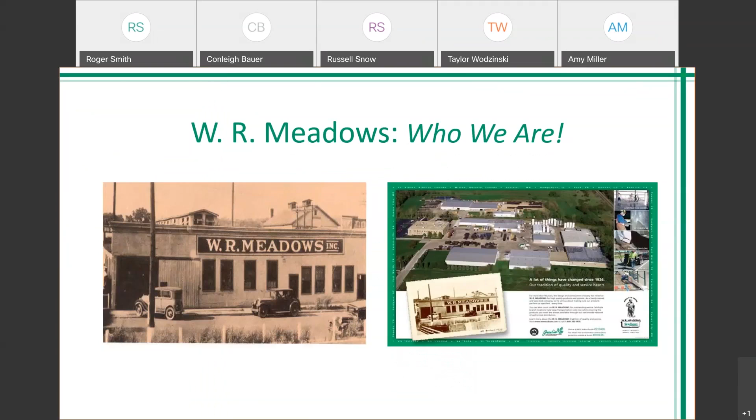Before we jump into the true content of this presentation, a quick recap of who WR Meadows is and why you should care about what we have to say. We were established in 1926. WR Meadows is a family-owned company, still owned and operated by the Meadows family today. We have 12 facilities in North America, most in the United States, but a few in Canada as well. And we have a huge portfolio of products.

We started off in 1926 with expansion joint materials, and we still produce expansion joint materials today. We have since expanded our portfolio to include concrete restoration products, construction liquids, joint sealants, and decorative concrete. We have a lot of building envelope products, which is what we're discussing today, specifically vapor retarders, but we also have above grade air barriers and below grade waterproofing, both horizontal and vertical.

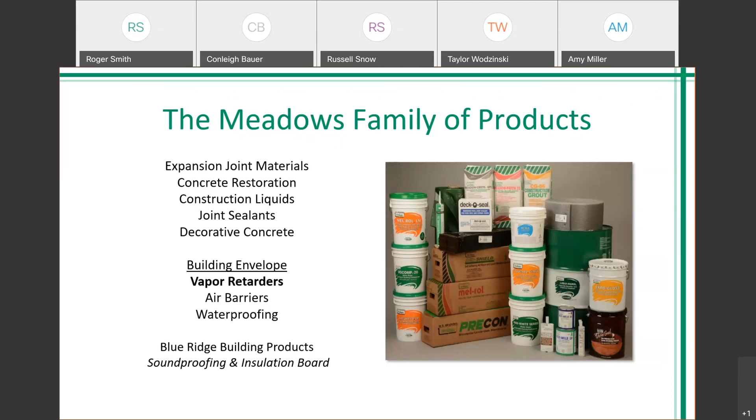The last note on this slide is just a shout out to Blue Ridge Building Products. They are a sister company of ours and they do soundproofing and insulation board. If you have any questions about soundproofing and insulation board, unfortunately I'm not the correct person to talk to, but if you get in touch with us, we can get you in touch with the right person.

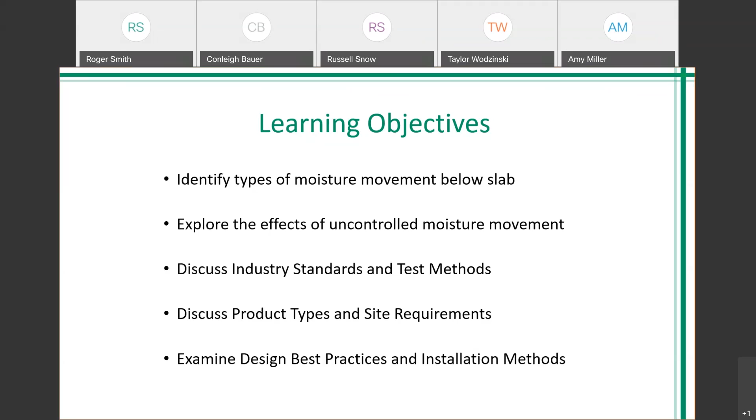What we're going to discuss today, some of our main learning objectives: first, to identify the moisture movement that occurs in our structure, specifically below slab. Why do we care about uncontrolled moisture movement, and what are some of the effects we're trying to reduce? We'll talk about some industry standards, ASTM, ACI, and the different test methods we can use. Towards the end of the presentation, we'll get more specific on product types and which to use depending on site conditions. We'll top it off with some best practices for design and installation methods, and how to ensure you get what you want on your project installed correctly.

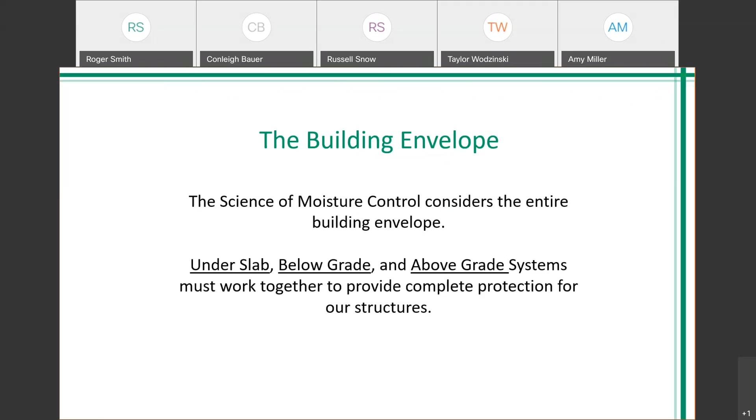As we move into the science of moisture control, it's no longer adequate to just talk about underslab or just talk about wall. We really are talking now about the building envelope, or even further, the building enclosure. It's important to understand that underslab, below grade, and above grade systems have to work together, be continuous and compatible, because underslab is just one part of the envelope.

The best place to start is at the beginning. In its most basic concept, the hydrologic cycle is this constant change of state from liquid water into water vapor, or water as a gas. So we have liquid water that absorbs a lot of energy, typically through thermal energy, turns into water vapor through evaporation. And then as that water vapor loses energy, it condenses back into liquid water.

When we build a structure, we put our structure right in the middle of the cycle. So it's not how do we fight against this cycle, it's how do we work with this cycle to move moisture out of our buildings.

When we're talking about moisture protection, we're talking about moisture in three forms. The first being liquid water, which is the most obvious. Also water vapor, water as a gas, as it moves through air. And thirdly, water vapor as it moves through diffusion - that's water vapor moving through any other substrate other than air.

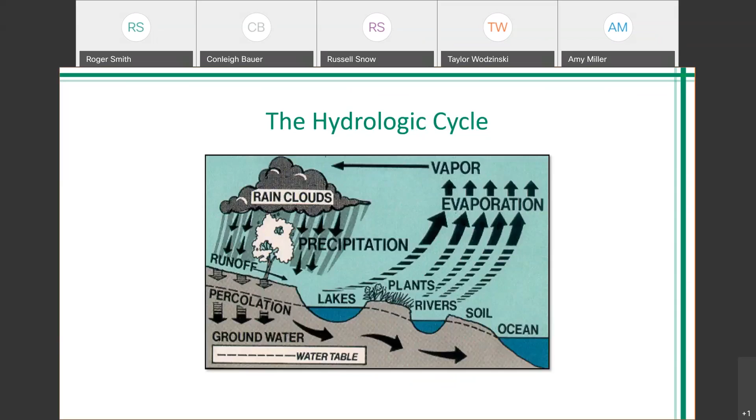In discussing these forms of moisture, we need to address how the moisture enters our structure. Let's start with liquid water. It's probably the most prevalent, particularly when we're talking about below grade and underslab situations. And there are many ways that liquid water can enter our structure.

One of them is to consider the water table. Is your building being built in the water table? Because if it is, you've got a whole different set of issues than if it's not. It's important to understand where the water table is. In Southern California, the water table can be as shallow as 5-6 feet and as deep as over 100 feet. So knowing the water table, and knowing that if we have water in constant contact with our structure, we need to address that and the hydrostatic pressure it places on our building.

Another thing to consider for liquid water is site drainage. Is our structure in sandy soil that drains well? Is it in clay-based soil or hard rock so the water has trouble moving through the below grade soil? You need to address and understand these issues. Another part of site drainage is understanding: if I've got sandy soil and my building drains well, does that open the possibility for additional water from someplace else coming into my structure? So it's important to understand site drainage.

Am I at the bottom of a hill? Am I at the top of a hill? Different issues can affect liquid water and drainage.

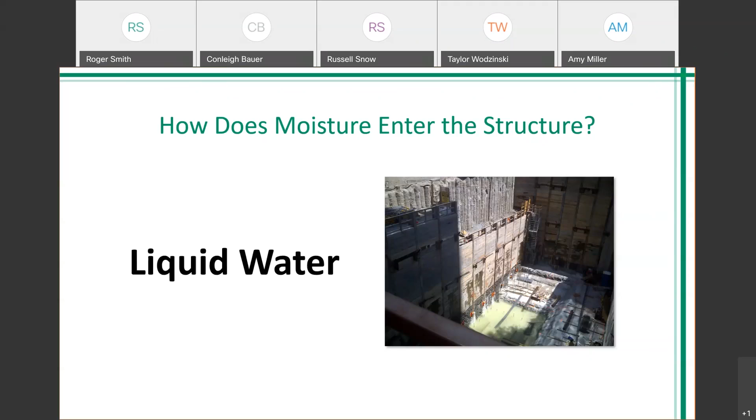Moving on in terms of water movement in the three forms, we want to look at air movement. Your discussion of details can't be emphasized enough, not only for liquid water, but for air movement and vapor movement in all of the building envelope areas. But air movement supplies a significant amount of moisture. Moisture-laden air moving through gaps and cracks can create real issues within the building envelope and within our buildings themselves.

And then also the mechanical systems. Turn on your HVAC system, you create pressure differentials, air is going to try to move in and out. Not only do we have positive pressures, but we have negative pressures in stack effect. When air is moving out of the top of the building, it's being pulled in at lower levels.

While most air movement takes place above grade, and most of that is addressed above grade, it must also be considered that air movement takes place below grade. Typically the air moving above grade, but we don't have air in the same sense below grade as we do above grade—we have a lot of gases in our soil. Water vapor is one that we're very concerned about, but also there's other soil gases too that we should be addressing if they're present, like radon and methane.

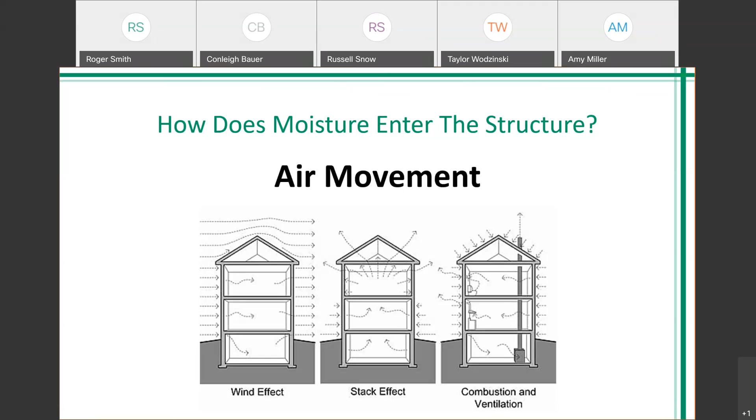Our last category of moisture movement for our structures is water vapor moving from below slab. Water vapor moving through diffusion, as I said, is any water vapor moving through a substrate other than air. So this is vapor diffusion.

First, consider your soil. The soil acts as a giant sponge. It is completely saturated at 100% humidity at all times. And so no matter what your structure is being used for, it is probably not at 100% humidity on the interior.

So when we have this difference in humidity, we have a difference in vapor pressure. Vapor pressure is going to move from areas of high concentration to areas of low concentration, meaning that we're going to have this endless supply of moisture just feeding into your structure 100% of the time. Concrete is not a good vapor barrier on its own, so we need to put some other material there to block this vapor pressure, this constant vapor drive into our structures.

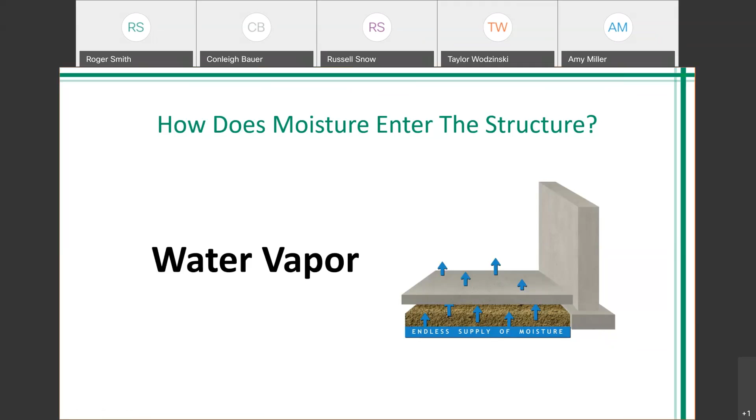Let's take a look at the seasonal vapor pressures and drives that occur around our structures. This slide represents a warm summer day, probably somewhere in the southeast, Florida, Georgia, 90 degrees, 80% relative humidity, creating a very high vapor pressure on the outside of our structures. The constants are the pressure inside the building, where we maintain temperature, typically 70 degrees and 30% relative humidity, which gives us a certain vapor pressure.

And then understanding vapor pressure from the subgrade, underground and underneath our buildings, where it's generally accepted to be 55 degrees with a relative humidity about 100%. So you have these vapor pressures constantly exerting pressure on your structure, and Mother Nature is always going to work to even out these pressures.

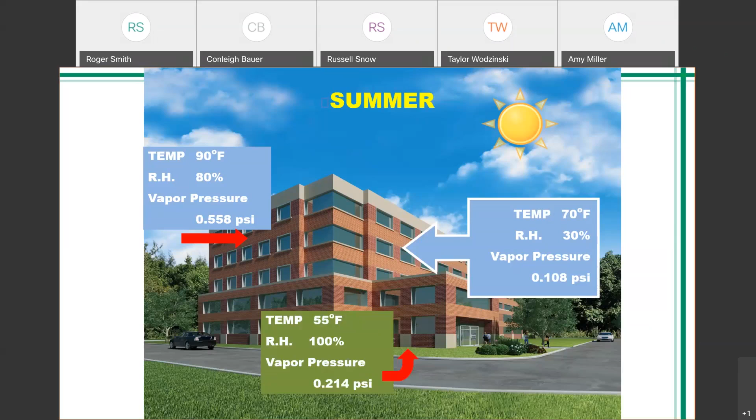If you look at the same structure in the winter conditions, you see that things change outside, right? Now we're not in Florida anymore, right? 35 degrees, 20% relative humidity, and our vapor pressure is reduced considerably, but our pressure inside the structure stays the same, and our pressure below the structure stays the same. So we still have those constant drives 365 days a year.

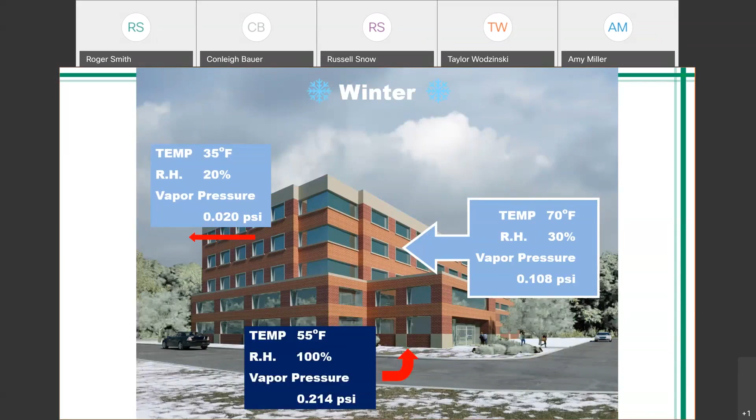So what does that mean? How can we define this and understand what occurrences are taking place? If we look at vapor pressure at 55 degrees, 100% relative humidity, you see 0.214 pounds per square inch. I know that's a small number in a small space, so we'll look at that a little further in a minute. If you look at conditioned space at 70 degrees and 30% relative humidity, we're looking at 0.108 pounds per square inch, or about half the amount.

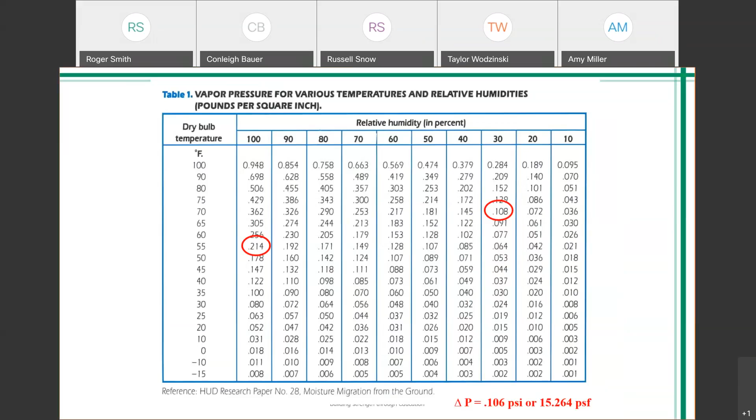Now, if you take that and start to blow it up, you're up to 15 pounds per square foot of pressure every day, 365 days a year, from below the ground onto our slab into our building. What does that mean? Where does that take us? Well, it takes us to a significant amount of water when you start to break it down. You're looking at 10 gallons per day per 1,000 square feet of building. So if you've got a 10,000 square foot structure, that's 100 gallons a day. For those of you on metric, that's 38.5 liters per 93 square meters per day. If you're looking at a 50,000 square foot building, you're really starting to see a significant amount of water transferring from underneath the surface to above the surface.

And you need to understand that creates a problem of more issues than we normally see. The other part to understand is the vapor pressure differential can change based on what our structures are used for. If we're using something like a clean room, we might have a different need or vapor pressure differential than something like a parking structure. So what are the interior conditions, and what do you need to be concerned about in terms of vapor drive?

When we're looking at this water vapor transmission rate, ultimately we want to get it as low as possible. Ideally, we would get it down to zero. But we also know that we have all these materials that we can use. When we're doing that equation, we'll be looking at the vapor retarder, but we'll know that you also have other materials to help cut down on vapor transmission as well. So we'll have the vapor retarder, the concrete, any flooring adhesives, and then the flooring material itself. If you're up north, we're also going to have insulation to consider. So all of these different materials are going to help cut down on the amount of water that comes into your structure every day.

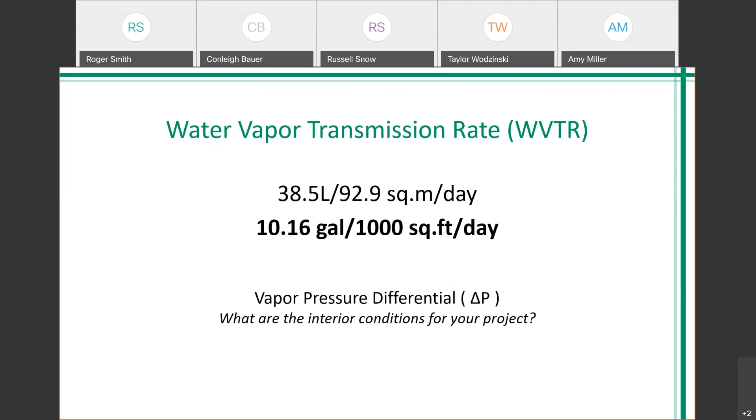Which is hugely important. I feel like I don't have to spend too much time on this, but most people understand that there are serious consequences for moisture infiltration. And our first concern is always the health, safety, and welfare of our occupants. If we have uncontrolled moisture coming into our structure, it provides the opportunity for mold and mildew growth. If we have mold and mildew growth, our structure cannot work as intended. We cannot have a hospital, a school, or an office building that has mold and mildew growth, because it's not safe for those people to be in that occupied space. Same thing with odors and indoor air quality. Health is paramount, so we want to make sure our air quality is the best that we possibly can get for our occupants.

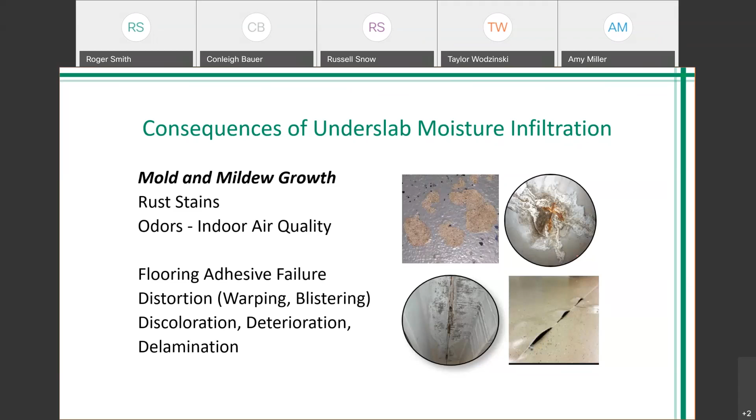Secondly, once we've taken care of the health and safety of our occupants, we're going to look at the very expensive flooring that we just installed. That's kind of secondary, but it's still really important. It's expensive to build buildings, and many of these finishes can be very expensive to replace. So if we have uncontrolled moisture infiltration, there can be flooring adhesive failures, especially with water-based adhesives. As far as the flooring material itself, often there can be distortion or delamination, and those materials would have to be replaced.

So why do flooring systems fail? Conleigh touched on the water-based adhesives, and being in Southern California, the land of the VOC, virtually all adhesives in our marketplace have become water-based and are subject to reemulsification if moisture is trapped underneath the flooring surface. But that's not the only reason that flooring systems fail.

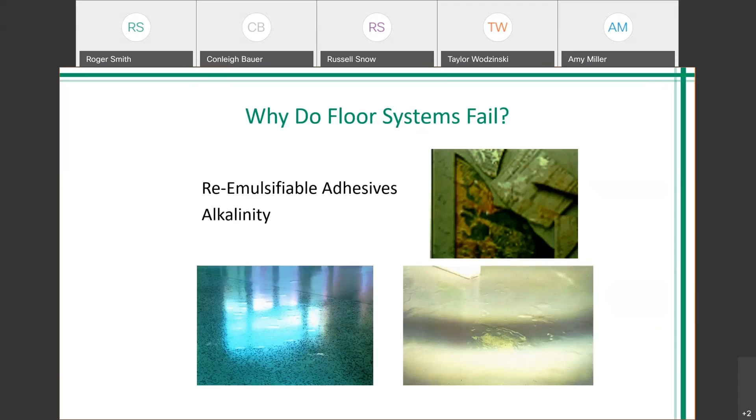There's a little, I kind of call it chemistry, in considering alkalinity of the concrete under the floor. When concrete is poured, it generally has a pH of about 12.5, toward the alkaline nature. And as the moisture starts to leave and the concrete begins to cure, it moves down into a neutral place, generally around 7.5, which is ideal. We want things to be neutral. We don't want acidity, we don't want alkalinity. And in this place, we're in a very good spot. Most flooring adhesives are designed these days to withstand a pH of 9 or below. So we're in a good place here.

However, if vapor drive begins to come through our concrete and get trapped against the tile or the coating on the surface of our concrete, the alkalinity starts to rise again and will often exceed that 9.0, up into the 12 range again. And now we're in that area where our flooring adhesives are subject to fail. So you want to make sure that not only reemulsification, but also alkalinity can contribute to flooring failure.

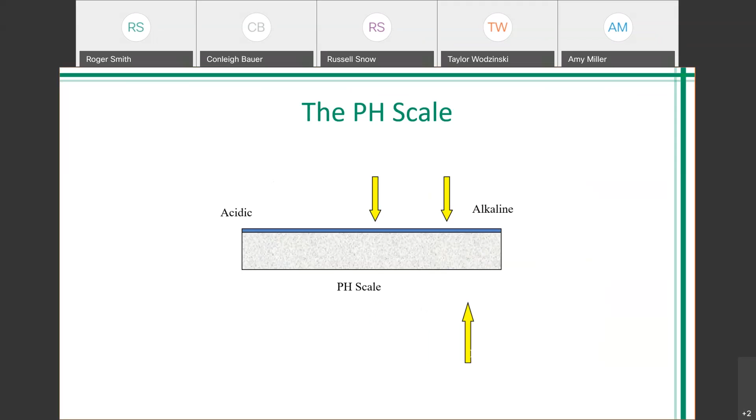Switching subjects a little bit, we're going to talk about the difference between a vapor barrier and a vapor retarder. I have tried very hard this whole presentation to only use the term vapor retarder, but I know I have slipped up. It's very common to hear these used interchangeably in the field, and at one time ASTM actually did recognize vapor barrier and vapor retarder as equivalent terms. But this is no longer true. ASTM now only uses the term vapor retarder, and there are very strict performance characteristics for what types of materials can be considered a vapor retarder, most notably the permeance rating of 0.1 perms or below.

It's important to understand that construction materials are permeable. Now, yes, our retarders have very low permeance ratings, and I use the term vapor barrier as well, and I'm sure I will. But none of them, at least none used in conjunction with an underslab vapor retarder system, have a 0 perm rating. I'm not even sure what has a 0 perm rating. I suppose glass, maybe a sheet of aluminum, but I'd challenge you to put a sheet of glass underneath a concrete slab and pour concrete over it. So it's important to understand that all these materials have some permeance, and there's going to be some amount of vapor going through the retarder.

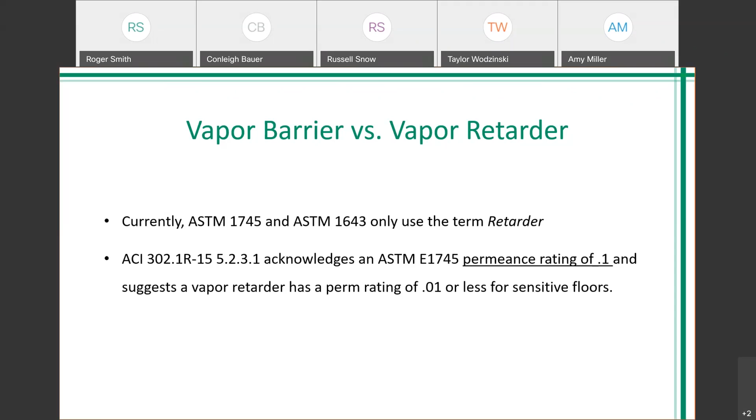So in looking at vapor retarder characteristics, I just got done talking about permeance, and it is important to understand that permeance and low permeance are necessary to have a positive installation of a vapor retarder. But there's more to it.

Permeance is important because we have to stop the vapor, but in this image, as you can so clearly see, there is a puncture. So we have other characteristics that we need to consider that will help or encourage the success or the failure of these systems.

Puncture resistance being equal, if not more important, in my opinion, than the actual permeance rating. All products under ASTM with that testing are going to have a low permeance rating. So your success is going to come from the puncture resistance and some of the other characteristics.

These materials are exposed to foot traffic and just general job site conditions. They take a lot of abuse before they're finally covered, and this unfortunately can lead to punctures. Even small holes in the membrane can allow a lot of water vapor through.

For example, there have been studies where an 1/8-inch diameter, like a nail hole, puncture in a 1,000-foot area of a membrane can change the permeance rating of that area to a 0.93. And if you remember, the industry standard is 0.1 perms or less, so we're already above the recommended perm rating due to that 1/8-inch diameter hole. A 5/8-inch diameter hole brings that perm rating all the way up to 2.2, which is significantly larger than that 0.1 perm recommendation. So yes, vapor permeance is important, but really take a look at puncture resistance, because in this instance, we are able to see the puncture.

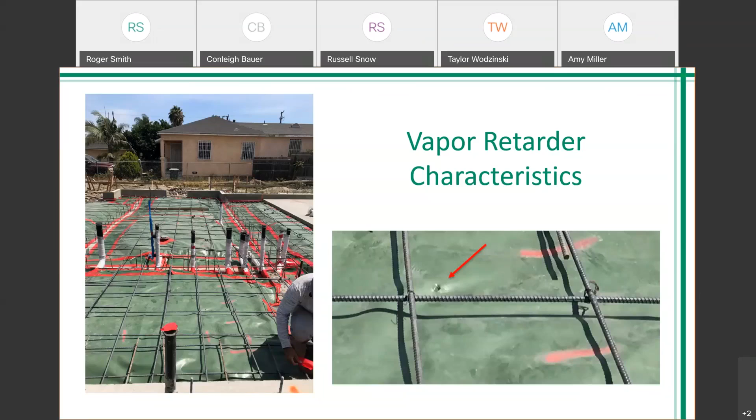Is our retarder compatible with the surrounding soil, the surrounding environment? Are there things in the soil, whether it be methane or radon or possibly hydrocarbons left over, VOCs, I like to call them the enes, benzene, toluene, that could degrade our retarder over life? Many of these systems will serve multiple purposes. I talked about methane and radon. Is the retarder I'm using capable of barring those things, or VOCs? You need to consider, when looking at the characteristics, what do you need from your vapor retarder system?

Jumping into codes and standards and different types of vapor retarders that we might see for different projects, ASTM categorizes them, separating the two different types of material with their own specific performance ratings and testing styles, completely separate. The first is ASTM E1993, which covers bituminous vapor retarders.

These can be more rigid or more flexible. There's a variety of different products under this bituminous category, but these are going to be the more robust systems, with significantly lower perm ratings, and usually, unfortunately, more expensive.

More commonly, for slab-on-grade applications, we're going to see the plastic vapor retarders. ASTM E1745 refers to the plastic vapor retarders. Within this category as well, there's many different styles of products, with different thicknesses: 10 mil, 15 mil, 20 mil. 15 mil is the most common.

We'll have extremely high puncture resistant products, and we'll have the gas retarders, as Roger mentioned. So even though there's two different categories with their two different testing standards, there's a lot of variety within each of these categories.

Now, the last one for ASTM, the 1643, is the standard practice for selecting, designing, installing, and inspecting vapor retarders. That's all best practices for making sure that the product you're selecting fits the site, that it's designed correctly, and that it is observed correctly prior to the concrete pour.

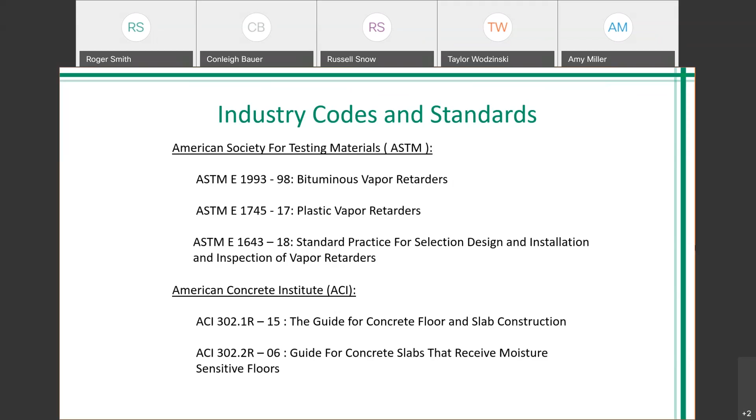It's also important to understand that ACI guides are not to be used in contract documents. There's a disclaimer on the front of these guides that says quite simply, these guides are not to be used in contract documents. Now, of course, you all know that your specifications are contract documents, so you don't want to use these in your specifications.

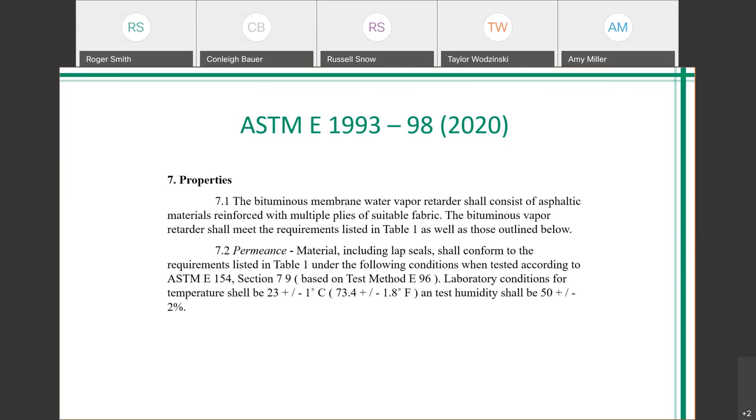So let's take a quick look at the two types of retarder systems defined by ASTM, including E1993, as Conleigh mentioned, bituminous membrane water vapor retarders. If it's not bituminous, it doesn't meet E1993. That's quite simple. E1993 also establishes physical characteristics, including permeance and strength testing methods and requirements.

And if you look at these requirements, they are quite stringent. You're looking at permeance of 0.002, which is extremely low. You're looking at tensile strengths that are extremely difficult to meet, and they provide excellent performance. A lot of the bituminous materials can be used in multiple applications in terms of water and vapor.

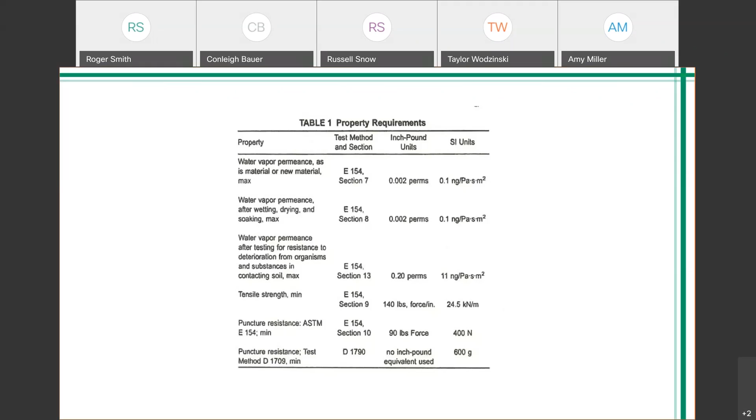So if you're really concerned about the project, I know they're more expensive, but you might look at ASTM E1993 type products.

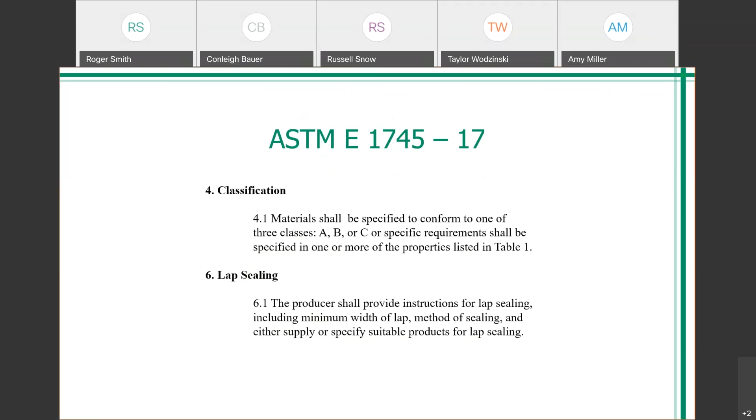For the ASTM E1745 type products, the plastic vapor retarders, they also have a list of physical requirements, and they even break it down further into Class A, Class B, and Class C type products. You'll notice that all three of those have the same permeance rating, so they're all 0.1 perms. If they meet this standard, they're going to have at least 0.1 perm or below.

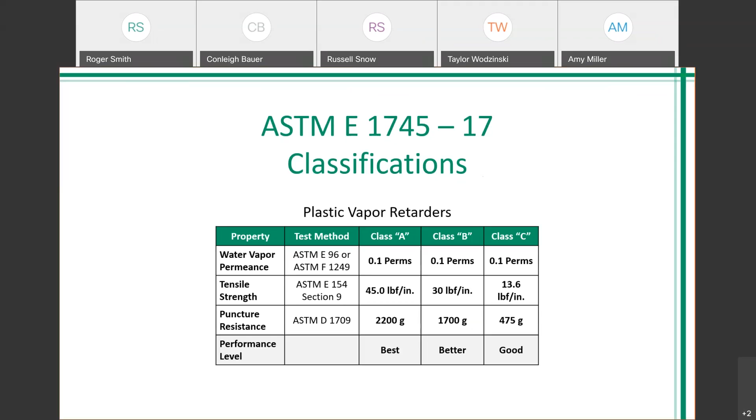You'll notice the difference in these classes are for tensile strength and puncture resistance. And as we've talked about before, punctures are a huge deal. If we have a puncture in our retarder, then the perm rating just skyrockets. So that's how we separate this good, better, best categorization—not by permeance, but by tensile strength and puncture resistance.

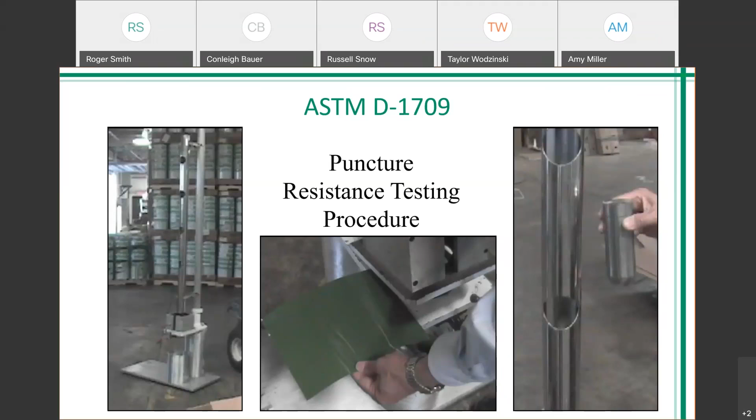So I want to turn again and talk a little bit about an age-old argument on vapor retarder placement. In particular, do we put sand above our vapor retarder, or do we pour directly onto the vapor retarder?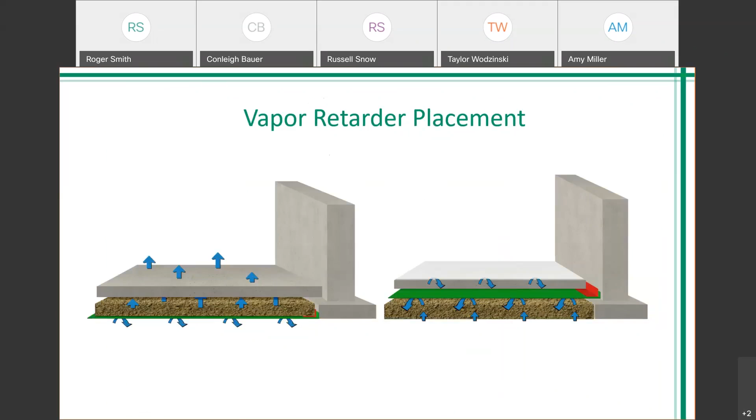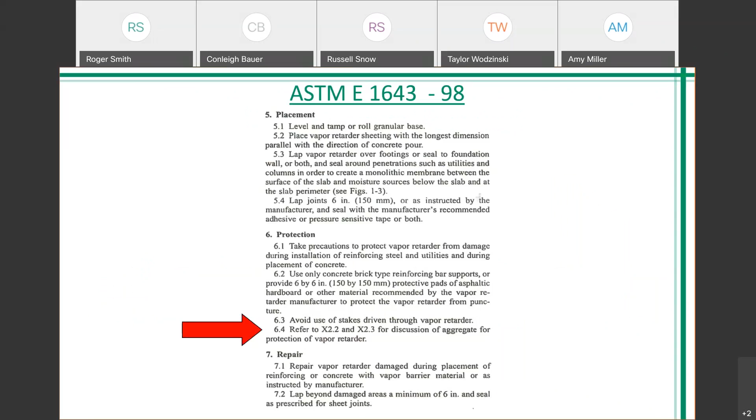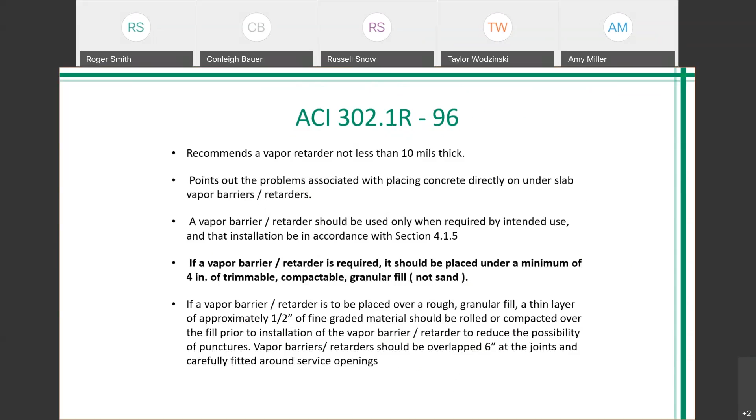This has been a long-standing argument. If you look at ASTM E1643 back in 1998, there's a section that refers to the aggregate protection of a vapor retarder. ACI back in the 90s also addressed this, stating in 1996 that vapor barrier retarders should be placed under a minimum of 4 inches of trimmable, compactable granular fill. Views have changed, and ACI revised their opinion a few years later to address these issues on a case-by-case basis, and that goes on today.

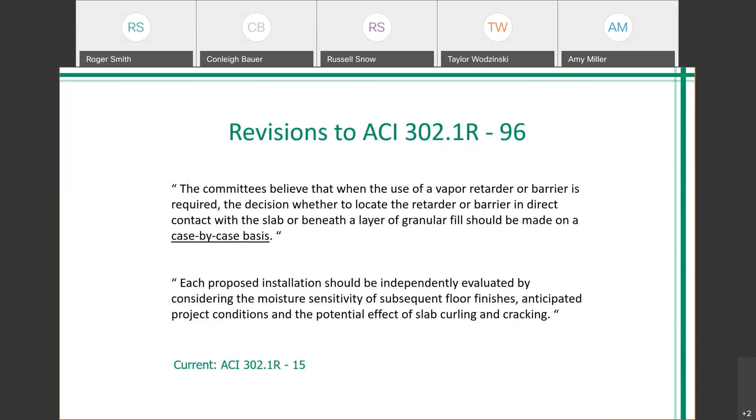Whatever your specification is, on the job site we have arguments, and there are valid arguments on both sides of this issue. I'm not going to say one way or the other—it doesn't always apply. ACI currently recommends placing the concrete directly on the vapor retarder, and WR Meadows is in agreement with this position, but you can have arguments on both sides.

Arguments for a cushion or blotter layer include a place for water to escape, bleed water to exit the freshly placed concrete, which can minimize slab curling, and the sand can provide protection for the vapor barrier material from job site construction damage—construction durability, as I like to call it.

Arguments against: you can still have damage whether you have sand on top of your retarder or not. And by introducing moisture into this blotter layer, you've created a reservoir of moisture between your retarder and your slab. Once we start to see vapor drive and differences in temperature, pressure, and humidity, that moisture is going to come up through our slab and potentially cause the damages we spoke about. All of these are valid arguments.

Here's my position. I've been on job sites and spent a fair amount of time working with contractors and distributors, so I've been in the hole and I've walked the job site.

When you look at a job site and your vapor retarder has been placed, often the general contractor will call the manufacturer: 'Hey, can you come out and look at this placement? We're getting ready to move on. We'd like you to take a look and let us know how it looks.' Manufacturers will do that—I do it on a regular basis. We'll come out and look at the retarder, and if we see some punctures, or maybe fish mouths in the tape, we'll get those fixed. And we'll write letters saying, on December 17th, the observation of the vapor retarder installation at XYZ High School appears to have been installed according to manufacturer specifications.

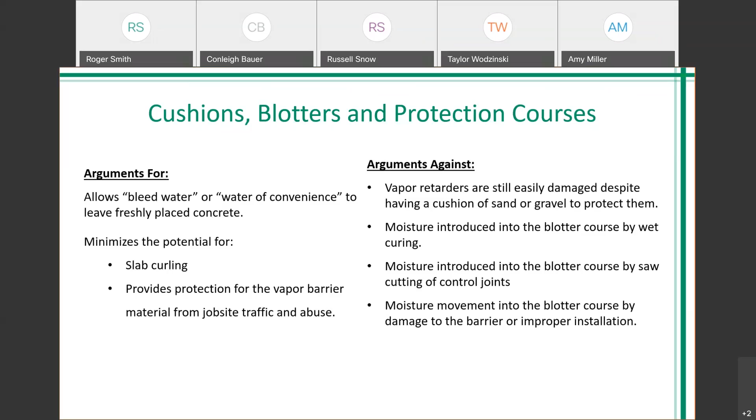Looking at a few installation photos now. Roger, how many times has that actually happened to you, where you're called out to inspect it after the sand has already been placed? It's happened a few times there. It also happens even on waterproofing applications, Conleigh, where they ask you to look at a waterproofing application and the drainage board has already been placed. So yeah, it doesn't happen a lot, but it happens, and not only with vapor retarders, but also waterproofing.

So a couple photos of the bituminous type of material installation. Like I said, there's more rigid, there's more flexible. This is a more rigid product. They taped all the seams, used tape in this application. You can also use a liquid membrane for the seams as well. And you can see with the pipe penetrations, they used a liquid membrane to seal around the base of the pipe as well.

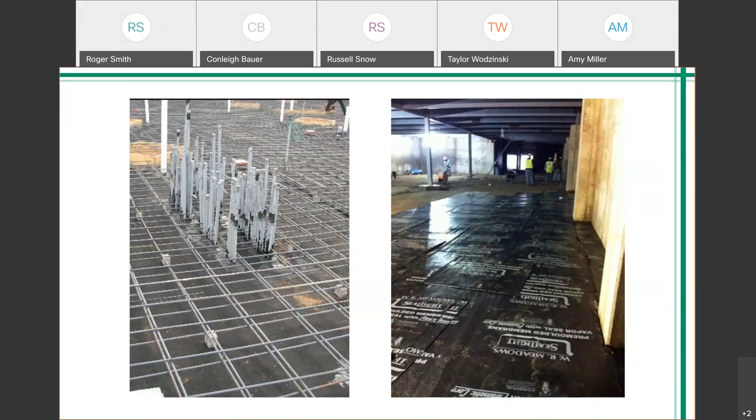In this picture, a little bit more complicated because we have these pipe clusters. Ideally, we would like to detail each of these pipes individually, but unfortunately, you could not get a human hand in between those pipes to detail each pipe individually. So what we do with these clusters is build a temporary dam around the entire cluster and flood it with a liquid membrane, sealing up all the potential gaps and cracks, and it flows through the pipes pretty well. It's known as a pitch pan application, so we're able to detail that area just by flooding it with a liquid membrane.

This last picture is just another example of the install. This would be our ideal situation where we have no penetrations whatsoever, nothing to detail. It's just membrane, so there's not going to be any issues. You can see that the metal has been placed and we are ready for the slab pour.

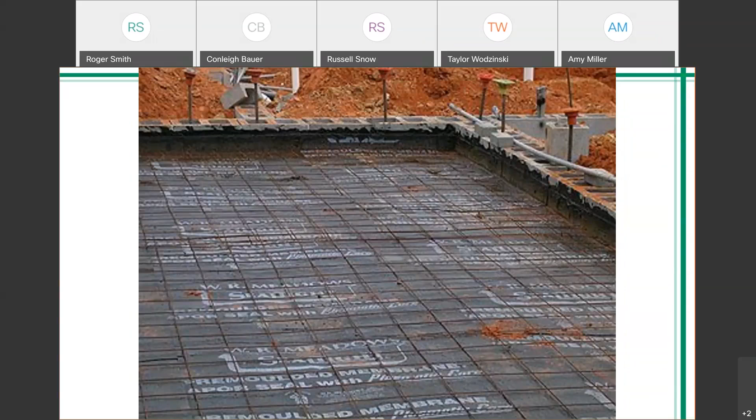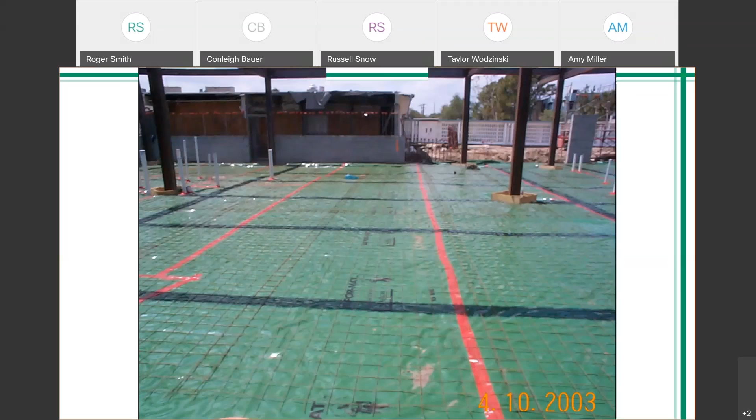So a couple photographs of E1745 installations, or plastic vapor retardant materials. Again, looking at this one, you can see the seams are taped. If you look in the background, you see some pipes that have been detailed with tape. There is some rebar present, or at least a mesh—looks more like mesh to me for this installation. But basically a pretty typical installation.

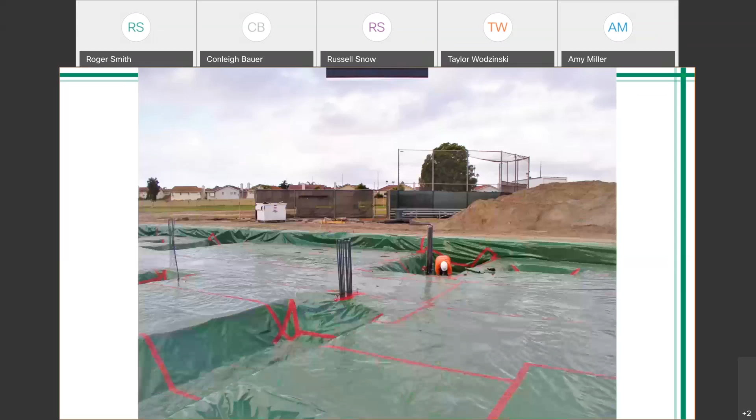Moving ahead, you see some things that are starting to get a little more complex, whether they're grade beams that need to be addressed, making sure that we get underneath all of the concrete. Here's a couple of Conleigh's favorite clusters showing up here, but you can see the installation, the materials, is pretty relaxed. The taping seems to be done very well. Got a guy finishing up on that last cluster in the background.

And then the next picture shows a situation where we really are ready to pour. Seams are taped, penetrations have been addressed, the rebar is up on some concrete stands, looks like we're ready to go. This would be the ideal time to get me back into the job to take a look at this, because all the work's been done. Yeah, it's a little bit hard to step around the rebar, but this gives you the best opportunity to make sure that your job is ready to go.

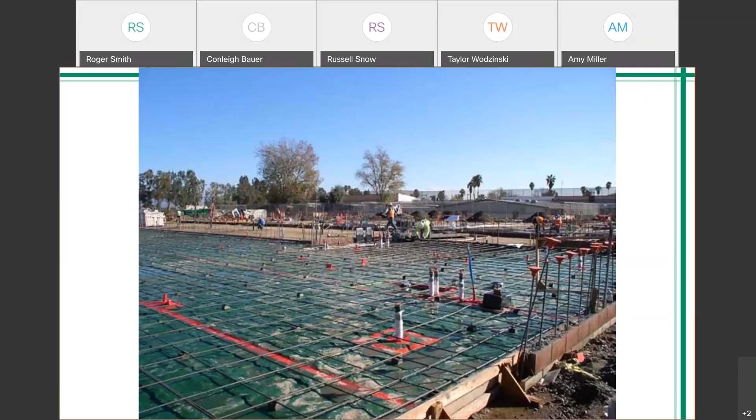So let's continue our journey into systems by understanding what factors can influence the effectiveness of our systems. We've talked to some degree about material selection, right? We want to pick a product that works right for our job. Not every product works for every job, whether that's a 1993 bituminous or a 1745 plastic. Are we concerned about puncture? What are those sorts of things that we want to look at? Are we compatible? All those things are part of material selection.

And then system design—we want to make sure we design a system that works within our project, but also within our location and with whatever other parts we're going to be in contact with. So system design and material selection are very important.

There are other important factors that influence effectiveness as well. The workmanship and the quality assurance is huge. So it doesn't matter which product you've selected for your project, or that you selected the right material, done a great design, documented it clearly in your plans. But if you don't have an installer with high workmanship, and if we're not able to observe the installation and ensure it was done correctly, then it doesn't matter how perfect your design is or how perfect your material selection is if it's not installed correctly on the job.

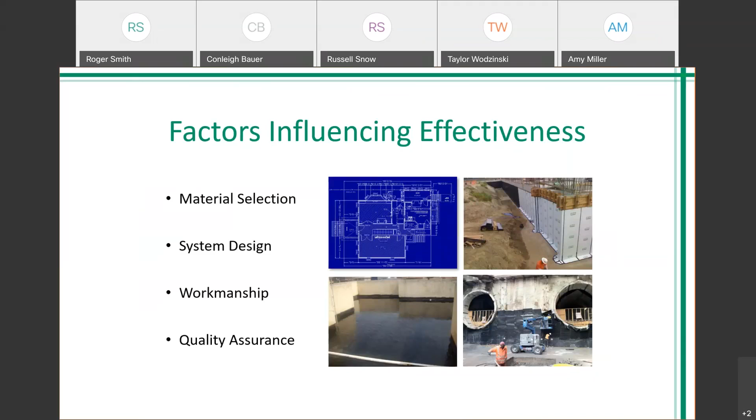In selecting the material for your project, it's actually very simple—it's creating a list of site conditions that we're designing for. So is this a slab on grade project? Is there a below grade component? Is it an occupied space or a parking garage? Is there some sort of controlled environment on the interior? Do you have a high water table, poor drainage, soil gases? If we're able to identify all of the site conditions that are challenges for us, then it is very simple to just connect those site conditions to the product that's going to address those conditions.

Another thing to consider is what's going into my structure. Is there sensitive floor coverings? Am I using an epoxy floor, or am I not covering the concrete at all? Or if you start to think about a gymnasium, high school or college, with a hardwood floor, those flooring systems are very sensitive to moisture and also considerably expensive to replace. So you have to look at all of these issues within the floor system, as well as the systems around.

And then compatibility, I mentioned it before. Can I transition to my other systems, whether I am at slab on grade, or do I need to transition to a waterproofing membrane? Are my systems that I've selected for my vapor retarder compatible with my surrounding systems?

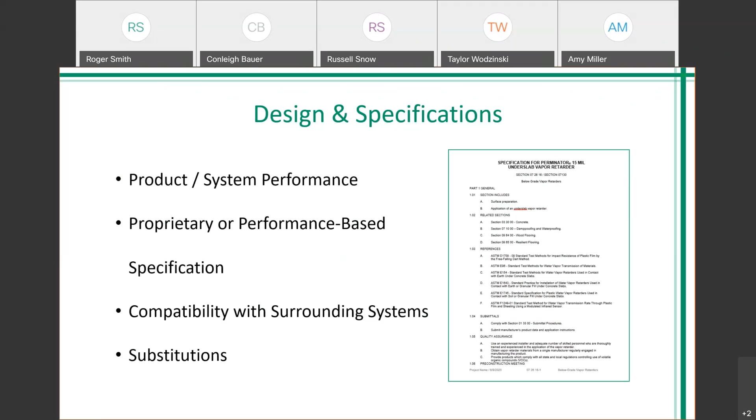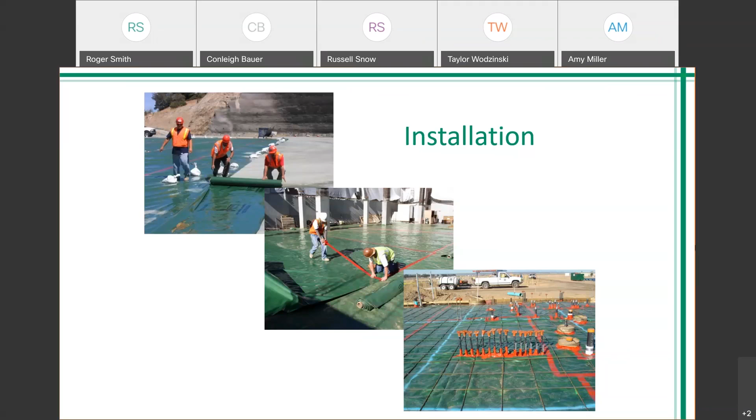And then at the bottom, again, almost ready to go. We've got that multiple penetration system that in this case was taped around. One of the more difficult details to address, it can create many problems, but it stresses the idea that detailing is key to the building envelope installation.

And they're fairly intricate, and there's a fair amount of work that goes into getting that tape into the right position, making sure it's sealed around the penetration and sealed to the barrier.

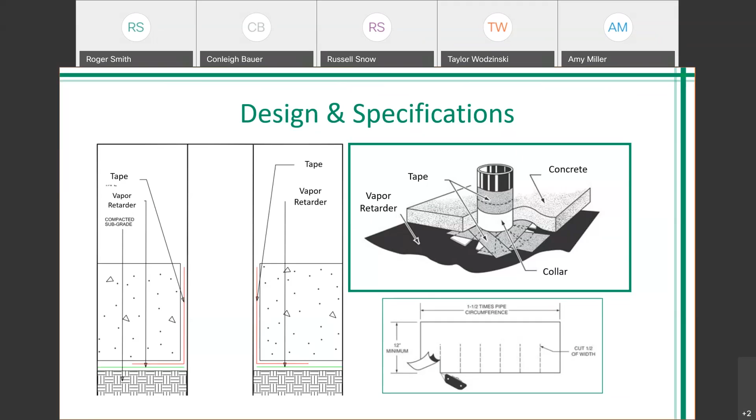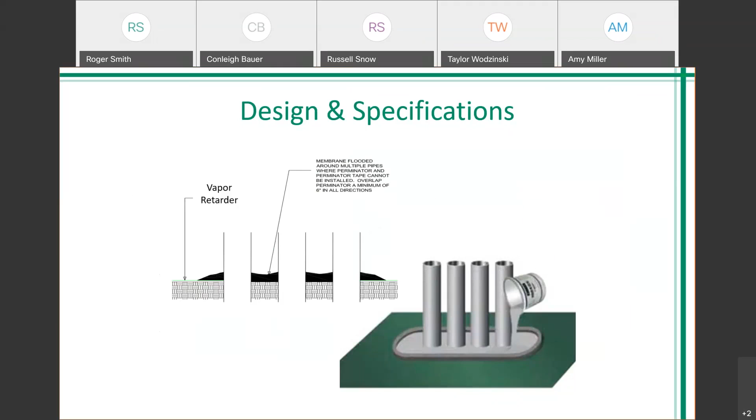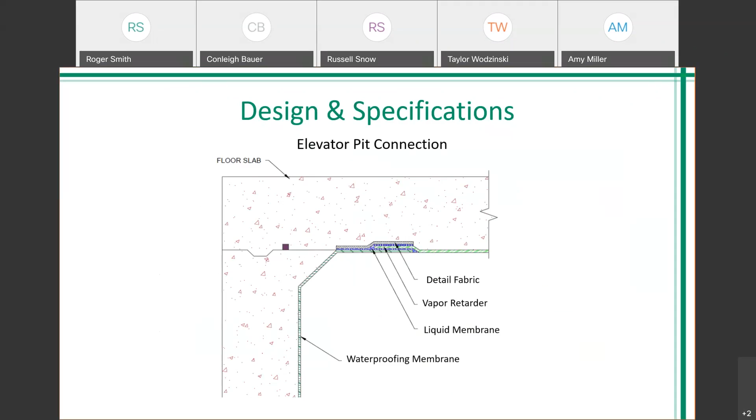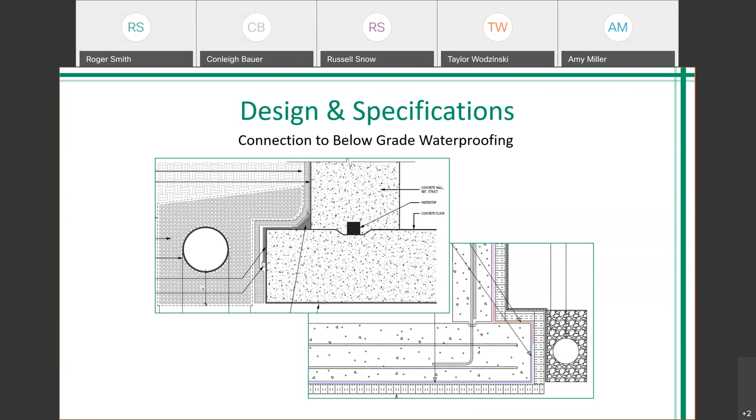We get this question a lot. I'm asked this probably at least once every two weeks: do we wrap the footings or do we not wrap the footings? From someone in the moisture mitigation business, we would prefer to wrap the footings from the standpoint of moisture control. Unfortunately, this does not always happen because moisture control is not the only thing we need to consider when building a building.

Yeah, you're absolutely right, Conleigh. And it reminds me of a time when I was relatively new with WR Meadows. Actually, I think it was my first observation of a vapor retarder installation. So, hard hat in hand, I'm out there thinking I'm really going to take care of this, and...

They were not wrapping the footings at that job, and I made the comment that it would be a much better system if we could wrap the footings, and tried to press my point pretty hard with the GC, who was then more than delighted to refer me to the structural engineer, who had insisted that his footing be in direct contact with the earth, something we find here in Southern California. As you know, we have a fair amount of seismic activity, and this structural engineer had no interest in having a piece of plastic between his footing and the soil.

So the young pup went back with his hat in his hand, understanding that while you might have a very good argument, you may not be able to fight City Hall in terms of a structural engineer.

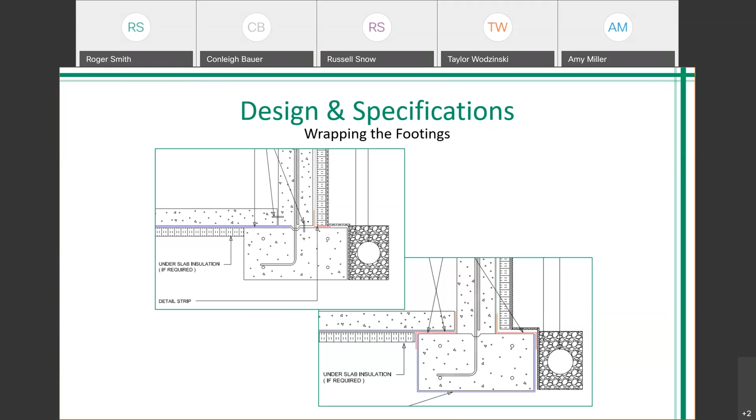Yes, always do what your engineer says. Yeah, exactly right, exactly right.

Just to wrap it up, we talked about a lot of different things today, overall of how moisture is moving into our structures, about the constant vapor drive and why we need to protect our structures against it. We talked about some of the ASTM standards, separating those two different types of vapor materials, which is very important, and understanding which one you need for your structure, and specifying, designing, and installing it the correct way, and hitting home the idea that details are critical. Other than the puncture resistance aspect, details are probably the most important for the success or failure of your system. So getting those right and installing them correctly is the most important thing.